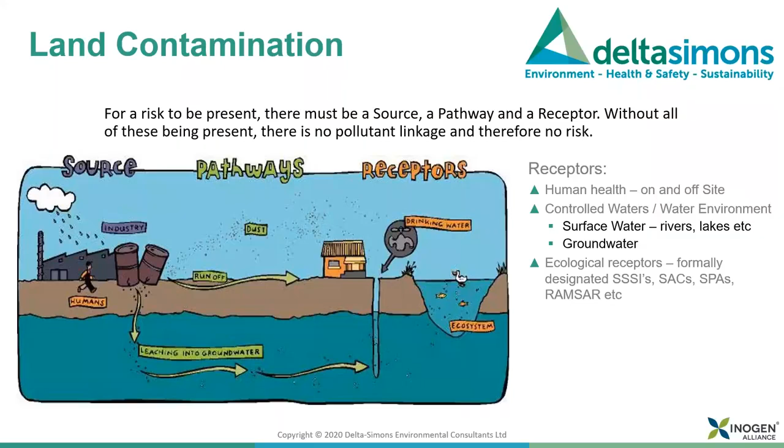And then there are ecological receptors, albeit these are only statutorily designated ecological receptors. So we're talking about SSSIs, special areas of conservation, special protection areas, and Ramsar sites, which are wetlands. Those actually add up to quite a large number of specific sites in the UK, but if they are directly threatened by contamination from a site, they need specific assessment.

It's designed for local authorities, and they are the ones who are required to look at their areas and proactively search for contaminated land and determine sites. So it's really designed to capture those sites that won't be dealt with through the planning process. And this is an area that has been underfunded for the last 5+ years, and there's not an awful lot of proactive investigation going on at the moment because the local authorities have a lot of other pressing needs and priorities for their funds.

So most of the remediation, in fact probably about 90% of remediation that goes on in this country, is actually related to planning directly. So this is for new developments, and within the technical guidance relating to planning, some of this has kind of disappeared from the .gov website, as again they've removed and simplified the guidance.

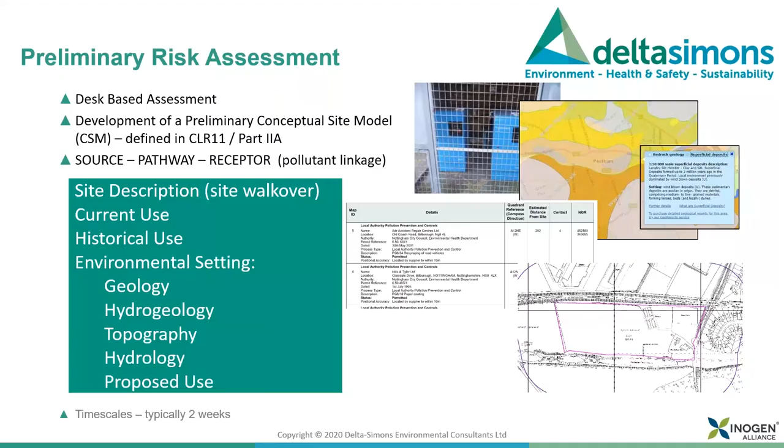So here's just a brief run through of what these things include. So as I've already discussed, a preliminary risk assessment includes a summary of historical land use, environmental databases, the geology, ground conditions, etc. And normally takes a few weeks, and like I say, is at most a few £1,000s depending on the size of the site. So includes all of that information in a desk study together with a site inspection.

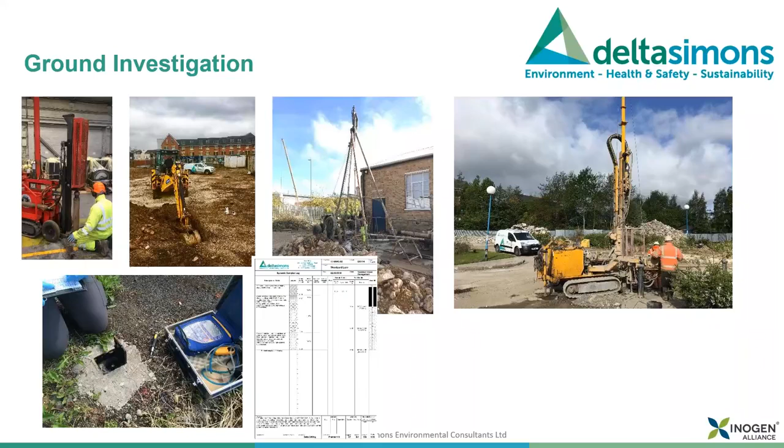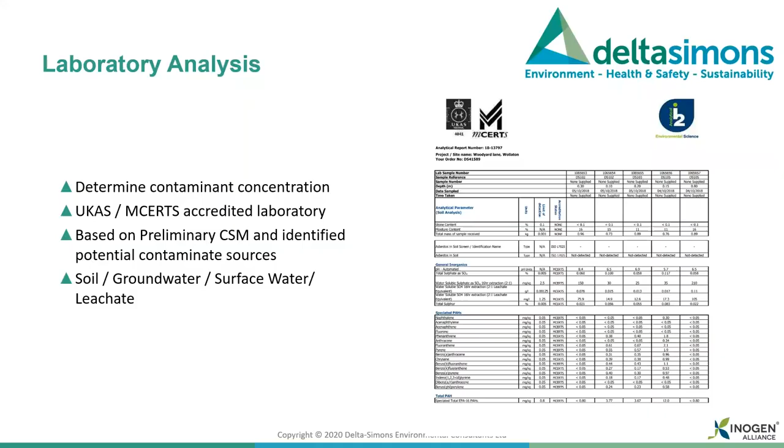Whereas ground investigation, as you can see, is a lot more intrusive in all senses of the word, a lot more disruption to the site, and will involve a variety of techniques depending on what depths need to be drilled to, where samples need to be obtained from, etc. The ground investigation will be supported by laboratory analysis of definitely soils and frequently groundwater, potentially surface water as well, and ground gas monitoring will normally be required to assess risks associated with ground gases, either to the future users of the site or surrounding land uses.

So there will normally be an initial fairly generic screen of laboratory results. So just an example on this, you can see in that table on the right, there's some arsenic results. Within the UK, there have been developed a range of generic acceptance criteria, which in this case, for arsenic for a residential end use, the acceptance criteria is 37 milligrams per kilogram. To cut a long story short, that's not an absolute number. It just means that if you have concentrations above that level, it needs further assessment.

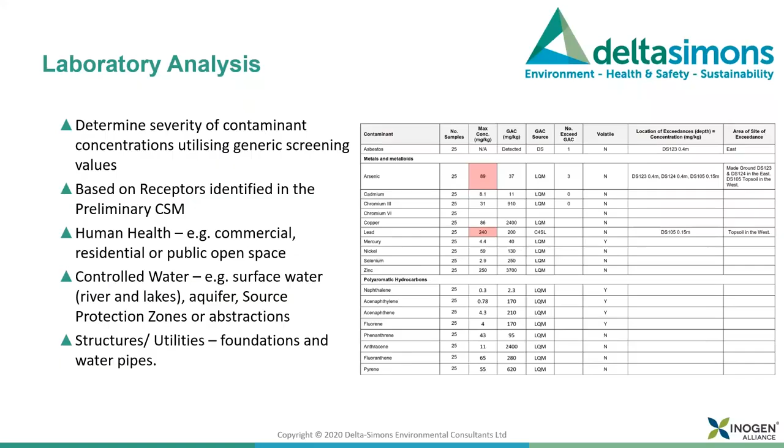It doesn't necessarily mean that that is going to pose an unacceptable risk. It just means you need to do more detailed assessment on it. So at that stage, you then look to do detailed risk assessments where you move beyond those generic values and use some more sophisticated scientific tools and computer models to generate actual site-specific targets. And then if those are exceeded, then we are looking at undertaking some proper in-ground remediation.

So this whole process, in an ideal world, the consultant will be liaising with the local authority and or environment agency as they go. So the environment agency for contaminated land will typically be consulted via the local authority. They'll normally have a quick look at the sensitivity of the site with respect to controlled waters. So is it near a surface watercourse? Is it on a protected aquifer? Is it near a groundwater abstraction?

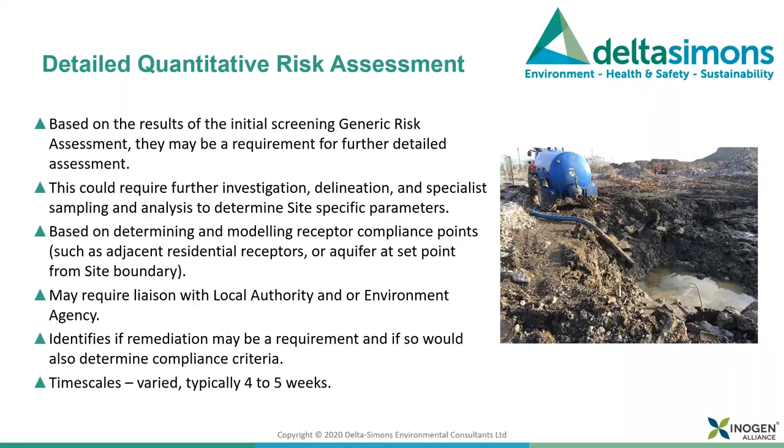If they determine it's not particularly sensitive, they will effectively say thank you, but no thank you, we're not particularly interested, and refer back to the contaminated land officer, who will then provide the appropriate review and whether the risk assessments are acceptable or not. If the site is in a sensitive location or the EA are particularly interested, they will provide specific comment. So that's not always the case. It used to be far more frequently, but their resources have been reduced, certainly since the noughties, and their priorities have changed somewhat.

So as necessary, a remediation strategy and verification plan will be required. And quite often the most common forms of remediation are actually relatively straightforward. So for most residential developments, if a risk has been identified, the key is to block any pathways rather than necessarily remove the contamination at source. So in that previous example where there was slightly elevated arsenic, that is actually very common in this country, the most common solution is actually to provide a clean soil cover layer.

And so the remediation strategy will need to state how thick that needs to be, the quality of that topsoil and subsoil that is normally imported to the site, and then how that is to be verified to provide the reassurance to the regulators and all of the stakeholders that that has been implemented properly. So that is most common.

The second most common is probably gas protection measures, which again does not involve removing the source, but typically is protecting future buildings, future dwellings by incorporating protection measures within the actual building fabric itself. So this is the typical type of remediation that takes place. There's other things that can happen. Often there'll be localized hotspots of contamination or associated with tanks and so forth that need to be dealt with. And it goes on to some potentially very complicated sites, depending on what that site history has been.

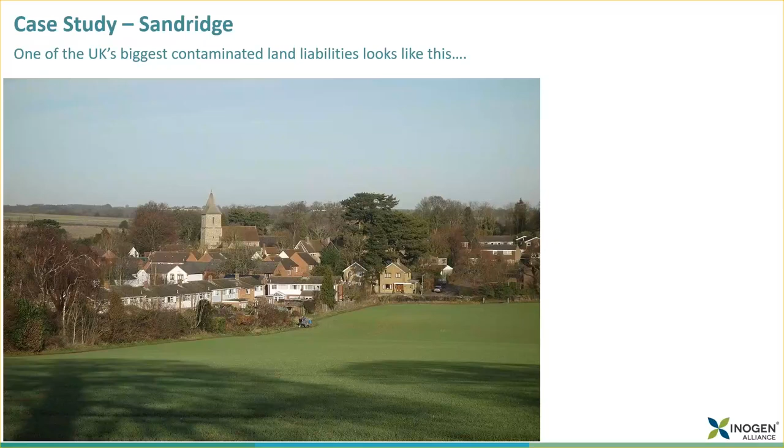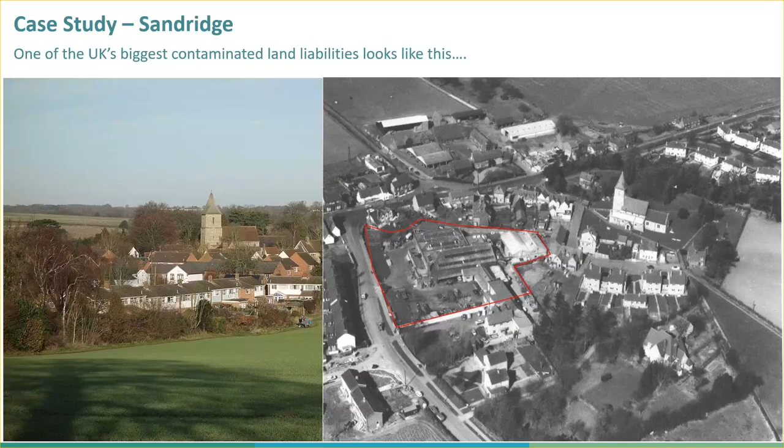So just quickly on to a case study for a site that didn't quite go right. And to be fair, this one did happen in the 1980s before the current guidance. This is just about the most contaminated site in the UK. I appreciate it doesn't really look like it, but I will come on to that. This is how it looked in the 1940s, I believe. It was a fairly small chemical works in a village in Hertfordshire, and it was operated by Steetley Chemicals, who manufactured potassium bromate.

And then Crest acquired the site in 1983 when the site shut down. And in 1983, Crest demolished the buildings and removed the slabs. And the process of going through planning and developing took a few years. So in 1987, planning permission was granted for 66 properties. And remediation that was deemed to be acceptable at the time was undertaken, and it was signed off and approved by the local authority.

Since 2000, in the wider area, there has been groundwater testing undertaken in the chalk aquifer, and it was found to be unacceptably contaminated with bromate, and a lot of work by the Environment Agency identified this site operated by Steetley Chemicals as the source. So a remediation notice was served. Redland and Crest, so the original polluter and the developer, appealed. It went through various appeals. It went on for years, to be honest, and it was rejected in the High Court.

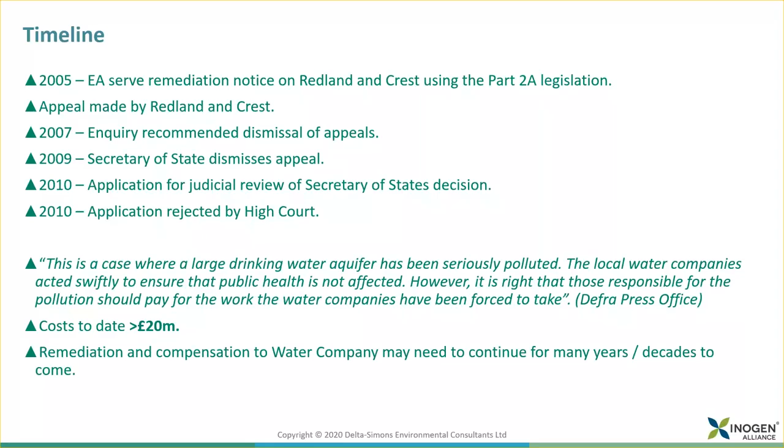And they have been required jointly to pay for the remediation costs, which have been over 20 million. And the question is why? Basically, this is ongoing for a long time, and this is the size of the problem. So effectively what happened was shallow remediation was undertaken, and the residents at the site are at no risk whatsoever. They were quite satisfactorily protected.

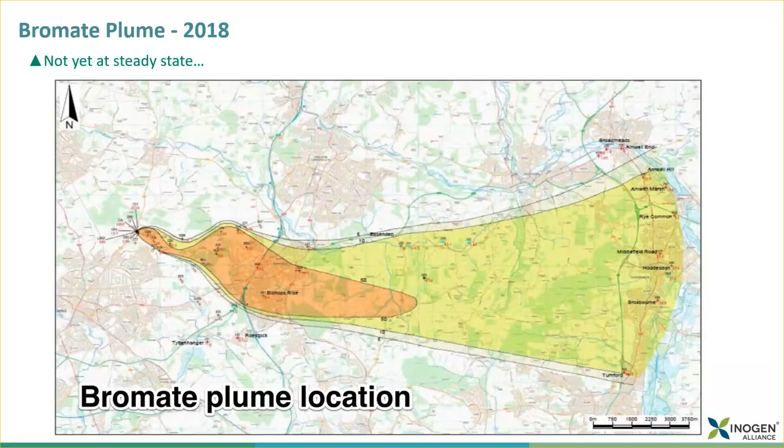However, the residual contamination at depth has been continuing to leach into the chalk aquifer and has now migrated over a distance of 30 kilometres. So this is the Lee Valley in East Hertfordshire, and the contamination's gone an awful long way. It is only being controlled by very vigorous groundwater pumping and disposal. An awful lot of groundwater is having to be discharged that used to be drinking water, and it's not yet in a steady state, and that problem is ongoing.

So this is another one that has gone through planning. This is Spodden Valley. This is the former Turner & Newall site in Rochdale. So that's it there on the top right hand side. So disused factory. Bottom right hand side is the woods, where that white stuff is actually asbestos fibres at the surface.

So the owner and the house builder jointly submitted an outline application in 2004 for residential development, and after a lengthy series of investigations, they submitted various reports in support of this application. Over time, it became incredibly controversial locally. There was a very effective local action group, got an awful lot of publicity. The issue was raised in Parliament on several occasions because it became so controversial. Effectively, the early reports, without wanting to say too much, did appear to downplay the extent of contamination, particularly with respect to asbestos in soils.

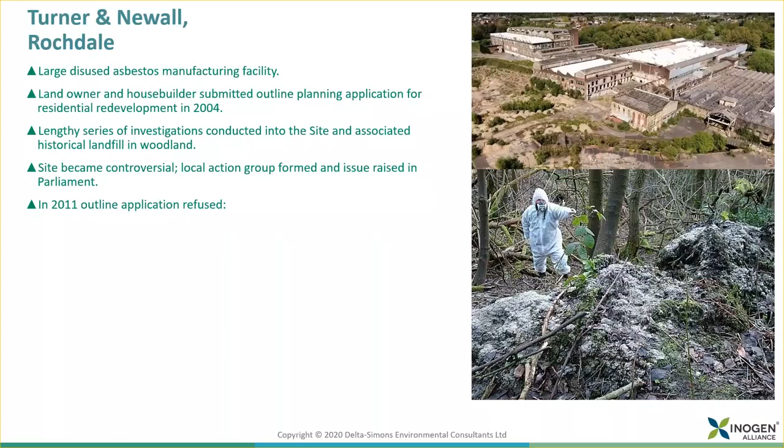And the end result was that the applicant never was able to submit sufficient information or reassurance that the site could be safely developed. And this is a direct quote from the planning decision in 2011, so it took a very long time. But this was the decision notice. So the applicant has failed to demonstrate whether the whole site can be safely and adequately remediated to support its safe redevelopment and future occupation.

And the site is really a site of two halves. You've got the factory in the top half, which in theory can be developed in a reasonably straightforward manner. The woodland is in a steep-sided dell with a river flowing through the middle, and woodland has grown up through the former tip. That is much more difficult to remediate technically and will always be a challenge. And the owner has tried since then to, from a planning perspective, detach the two areas and just obtain planning permission for the factory area, which is the flat-lying area, and let's say is more straightforward.

The local authority has refused for that to be allowed, and basically does not want to allow creation of what would be an orphan site, which has substantial difficulties, and enable the wider area to be redeveloped. So I'm not a planning specialist, so I don't know the technicalities of that, but that's effectively where the site currently sits, and it is therefore still derelict. There have been some further investigations that have taken place, but it looks like it will require substantial funding support to support a development in the future. It's not something that looks economically viable without intervention.

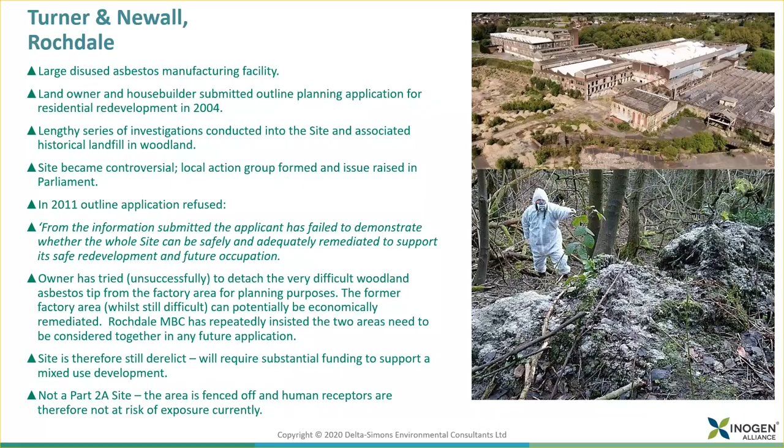However, just coming back to Part 2A and the legal definition of contaminated land, this is not a Part 2A site. You might find yourself surprised when you can see loose asbestos at the surface in the woods. The simple fact is that the site is fenced off. So humans are prevented from entering the site, therefore there is no receptor on site that can be exposed to that asbestos, or at least that is the principle anyway. So it is not a Part 2A site, despite it being very contaminated. So that's just a reminder of how important the conceptual site model is, and the presence of not just a source, but a pathway to your receptor.

So those are two examples where things have not turned out brilliantly for the developer. Here is one we've been working on for a long period of time. This is actually one of Sinead's examples, so apologies, I don't know the details particularly, but we have been working for the London Borough of Barking and Dagenham for a long period of time to support the redevelopment of a huge area of formerly industrial and quite contaminated land. And that has been successfully undertaken through a number of years.

And just going back to that, it does rely on a good level of initial information, both desk study and site investigation, particularly on a site like this, which had a lot of heavy industrial usage, to provide confidence to the regulators, and then undertaking more detailed stage investigations as individual plots are taken forward for development.

So I realise that we are probably running a bit short of time, so I'll try and quickly run through some further aspects of ground risk. So just to be aware of standard planning conditions, there have been a number developed, but as a consultant, where we don't often particularly get involved, just a few tips really to try and make sure that they are both as site specific as possible and can be implementable. So make sure if there are pre-commencement conditions that they can actually be achieved via pre-commencement.

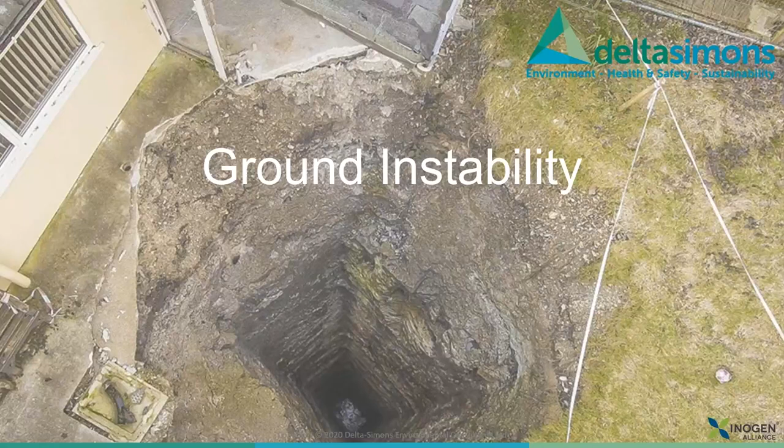So onto ground instability, a nice shot there of a Cornish tin mine, which opened up in somebody's back garden a few years ago. That photograph is taken via a drone, you'll be pleased to hear. So ground instability comes in a number of guises in the UK. Some are very common and familiar, some possibly less so. Coal mining is one that affects specific areas. Brine subsidence and former salt mining also specific areas.

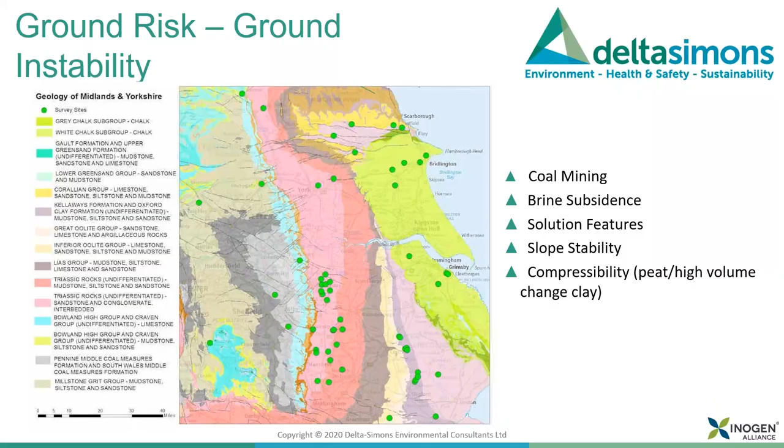Solution features will relate to calcareous deposits, so limestones and chalk and so forth, and particular areas. Slope stability will relate to particular topography local to a site or even on site, so that can be very site specific, as can compressibility. So that might be deposits of peat, or there might be clay deposits, particularly in the southeast of England, that have very high volume change potential depending on moisture content. So there's some clays, particularly in the southeast of England, that can be affected by that.

So similarly, the planning policy framework provides a flowchart for land instability and you can refer to that there. But again, there's a process of, if there's a risk of instability identified, and a good preliminary risk assessment should ideally cover off both instability risks as well as contamination risks, but do check the scope of that report to make sure that has been covered. Then they should be identified. Local authorities might have very good knowledge of their particular patch as to what issues they come across and need to deal with. But again, it's a commensurate level of information to the risk. So making sure that either all these issues are discounted or addressed appropriately.

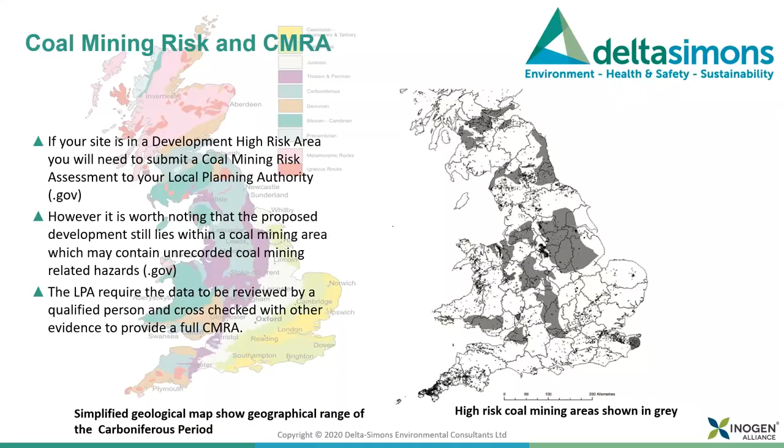And there's a reason why this is particularly important. So coal mining areas, again, it's probably familiar, but does cover quite a lot of the area. So that map on the right-hand side shows the areas that are affected, but it's actually those black areas that are the most high-risk areas. Those are mine shafts. But there's a lot of the country that is potentially affected by coal mining.

This is a fairly typical coal mining planning condition. So the Coal Authority is a statutory consultee for coal mining areas, and you can see on their website they have a very helpful tool. But where there's a high risk area, by their definition, then there needs to be a coal mining risk assessment, or a CMRA, to be produced in support of planning permission.

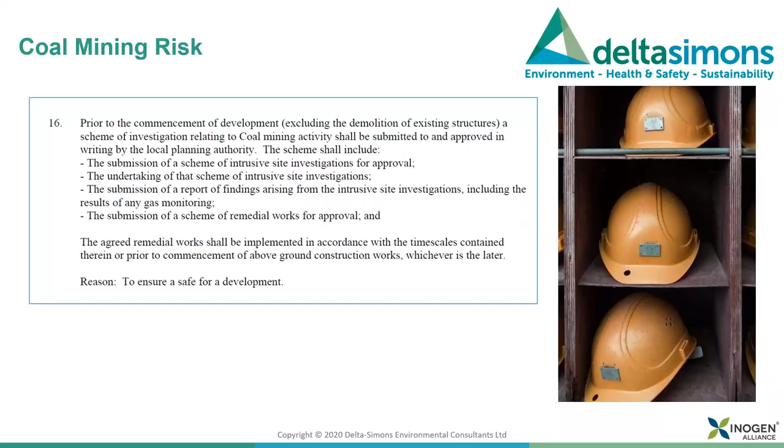So in the past, there's been schemes where this hasn't been spotted and houses have been built over the actual high wall itself. And what happens is the house foundation kind of rotates and tilts and cracks in two, in effect, in places. Numerous houses over the years have had to be demolished because that has not been spotted. And what you have is a no build zone. So we've been working with the developer on this site to identify and avoid the high wall. So that orange shaded area in the middle of the site, they have completely avoided that former high wall to ensure that those risks are avoided.

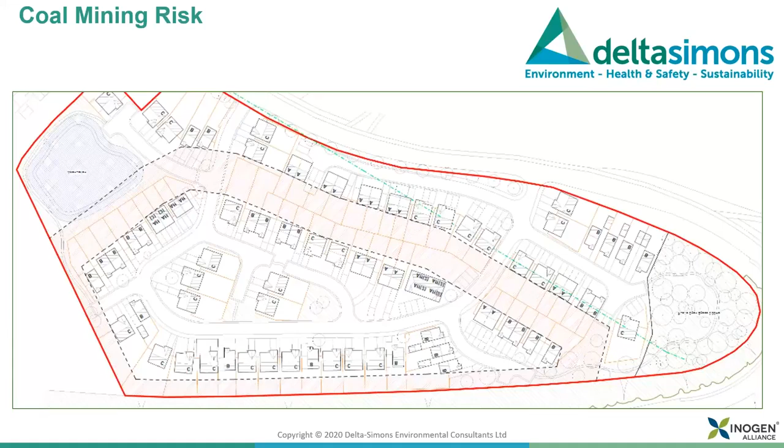Now, if that master planning exercise had been done before this investigation, then potentially they would have had to rip up the master plan and start it again. So it's very important where there's a site like with an open cast that this work is done before the planning application is made, because that master plan that may be approved could be undeliverable, and also it could be unviable if you start having to effectively delete plots from a master plan because they're over a high wall. Then how many houses do you have to remove before the scheme becomes completely unviable for the developer? So it's very important that's taken into account.

Coal mine, so former mine entries, is a similar one. So this is a series of potential mine entries circled in red on an existing master plan that's not taking it into account. And so, for example, the one in the southern centre of the site there, there's actually a plot over there. And because it's not taken into account the mine shafts, effectively houses cannot be built over mine shafts, even when they're treated and capped, because the residual risk is considered too high by the Coal Authority.

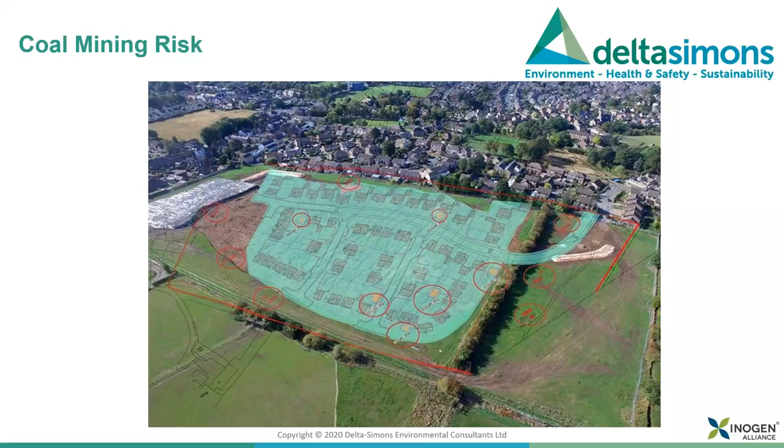So if this developer had proceeded with that master plan and then found or attempted to locate these shafts, there's potentially a good number of houses there that could not be built. And again, if this developer had to remove half a dozen plots from that development, does it suddenly become unviable? So make sure the master plan is developed with the location of mine shafts in mind. And this is one that has been done. So this is the way to do it.

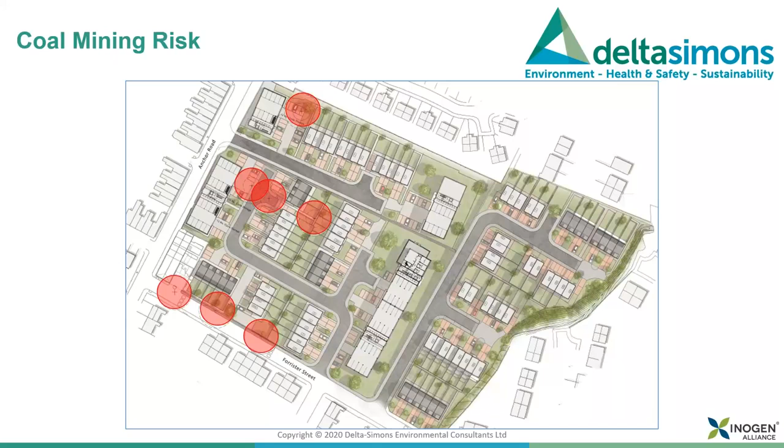So this is a site in Stoke-on-Trent that had a number of shafts, and the architect and the developer have moved the plots out of the way to avoid the potential zone of influence of the former shafts, so that wherever they're located, they know they can confidently still go and build these houses. So that's a way of managing the risk early on and making sure that they don't obtain effectively worthless planning permission. Because remember, just moving one or two plots around to try and avoid mine shafts means you have to start again with your planning application. So the time and cost associated with that is not inconsiderable.

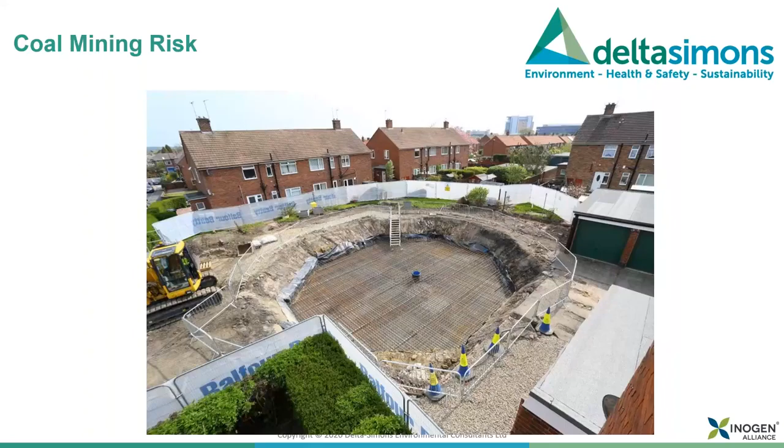Just to give you an idea of how big some of these features can be. So this is a recent housing development where a shaft is being treated, and it just shows the kind of area that they can take up. So if it's not taken into account at master planning stage, it can be a really significant constraint. So I will move on through here to salt mining.

So very specific to my neck of the woods, South Manchester, Cheshire is probably the main area where brine is a particular risk. So the plan on the right is showing the brine consultation areas where there are particularly known risks. So areas around Winsford, around Crewe and Northwich are particularly known as issues.

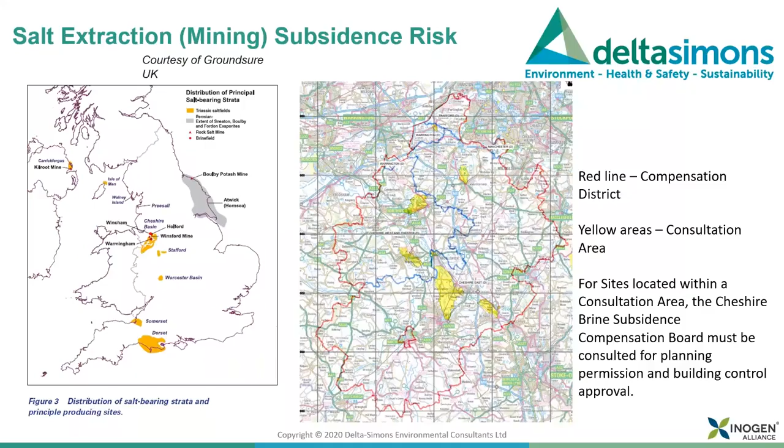And there's some very famous photographs of Northwich which subsided on a huge scale in the 19th century, when all of the underground interconnected mines became flooded. Somebody accidentally diverted a surface watercourse into a mine, and basically it turned into an underground river that started dissolving the entire underground salt network. And that kind of thing happened literally overnight in some cases.

Again, in the Cheshire area, there will be specific conditions if necessary, and there's the Cheshire Brine Subsidence Compensation Board, which is a bit of a mouthful. They are part of the Coal Authority now, very similar to a coal area. There needs to be a specific process gone through, consultation undertaken with the board,

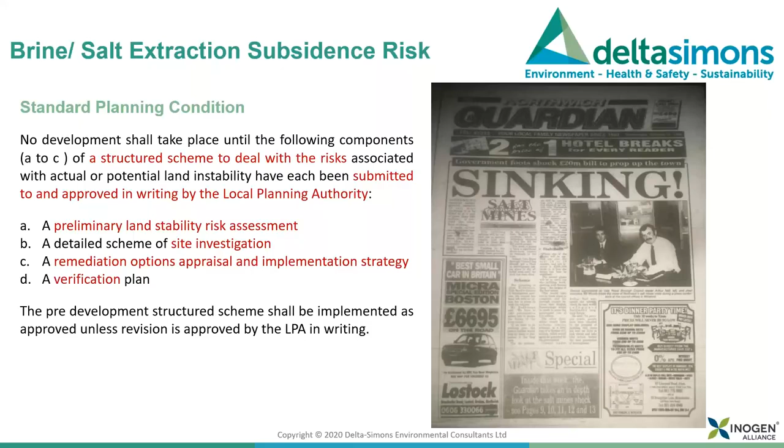and there can be broad subsidence because of salt dissolution at depth, but also there are brine shafts and brine wells which have to be treated very similar to a coal mine shaft, and again that can affect the master plan, so that needs to be considered too. There's other types of dissolution that take place.

So this is gypsum, which occurs through a strip of land through the East Midlands and parts of Yorkshire, and this has caused some very recent subsidence as well. This is some fairly recent subsidence that's occurred on existing housing. It's quite a well-known issue in the area, and particularly around Ripon.

A lot of work is being done on this particular risk, and again, the local authorities in this area typically know an awful lot about where their risks are, and they will generally be requiring this work to be done in advance of planning to ensure that those stability risks are taken care of.

So slope stability, this is one that's far more site specific. So this is one we're working on at the moment. Again, the client was aware of it. So this is adjacent to the Macclesfield Canal. That photograph doesn't show it terribly well, but the slope is in places close to a 1 in 1 angle. Now it is probably stable entirely because it's a very old slope and it's got 100-foot high trees all the way along. The trees themselves and their roots will tend to provide an awful lot of the stability.

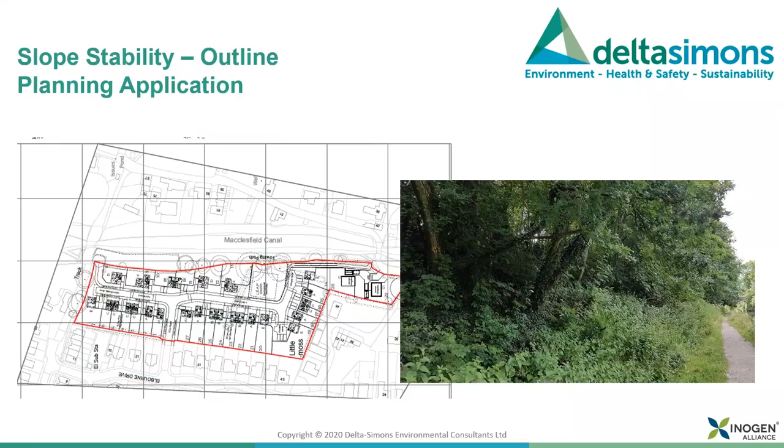And as I said early on, the costs in terms of mitigating ground risk and ground stability risk can be more substantial than contamination. So within the whole development team, and I'd include the regulatory side on that, make sure that there is sufficient information at each stage, but also it is only commensurate with the risk, so that very detailed assessments aren't undertaken in advance of planning all of the time. Just make sure it's only undertaken when reasonably required.

So that is a process of having good desk-based work done up front to identify the risks, and then where necessary, undertake intrusive investigation to actually assess those risks properly, and make sure that where there are ground risks, whether contamination or geotechnical ground stability risks, that the master plan is not fixed at too early a stage, so that the architect, the master planning, the client is involved and aware of the ground risks